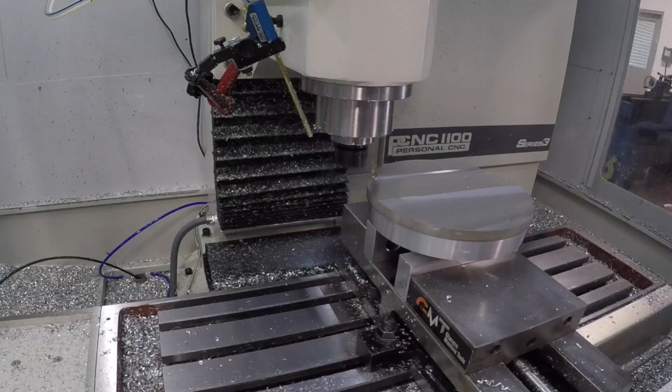So what is this? It's a cast iron cover that goes on a locomotive or a train. It's a project for Keith Rucker. If you haven't seen Keith's YouTube channel, card here. Keith's a great guy, he does some really cool stuff, mostly manual.

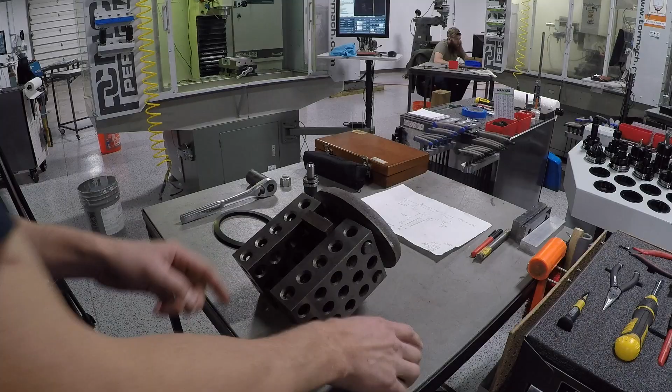And guess what, the task at hand is to machine a groove for this ring, and that screams CNC. This is going to be an easy job, knock on HDPE. So let's show you, I spent some time thinking about this fixture. Let me show you what I've got here, and I'm going to tell you why I didn't do it a few other ways. And then I want you guys to tell me if there's a better way or how you would have done it.

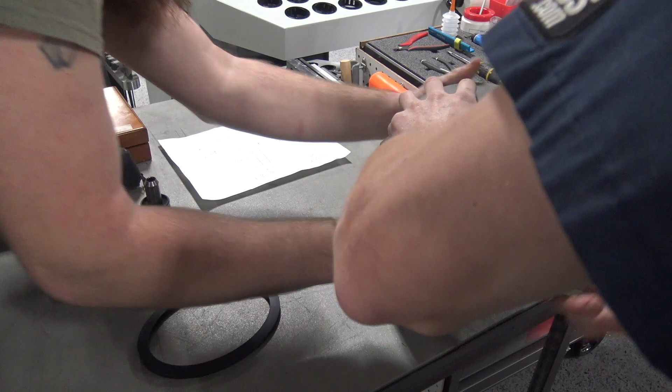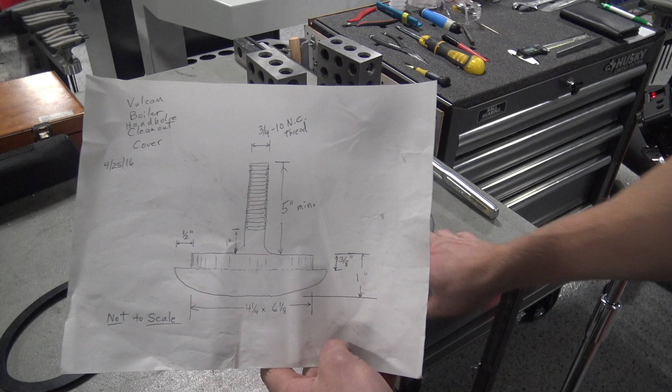So the task at hand, as you can see from Keith's drawing, is to machine a groove about 3/8, help if I turn the drawing correct way, 3/8 of an inch deep and about 1/2 inch wide. The good news on this project, the tolerances are real loose, nothing crazy from a machining standpoint.

The bad news is two things. One, tricky to fixture. Two, it's cast iron. I think I've only machined it once before, and it makes a mess. Wasn't going to turn the job down because of that, but I was excited to do a collaboration with Keith. But man, cast iron ain't fun. It should be pretty easy to machine though.

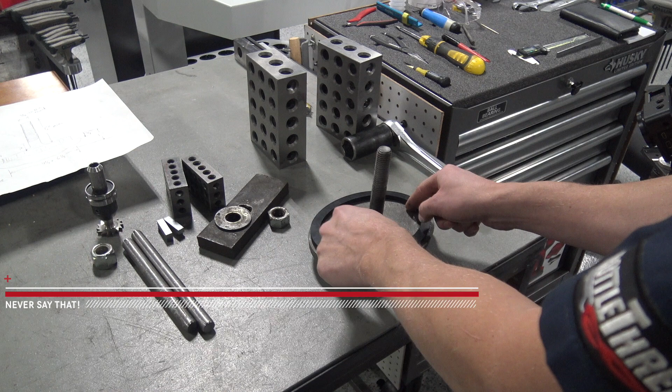So again, the idea is this ring is going to slip over this. What the problem is, this screw, period. Now, we have enough room on the Tormach where the spindle here has enough clearance to where we could actually just hold this and machine it around just like so. And obviously, that would be the easiest way to do it.

The problem is this was a cast part. There's a taper there, so there isn't a really easy way to get this exact geometry or to hold it with that taper, because even with soft jaws, as you pinch on them, it's tricky. By the way, card here to Keith's video.

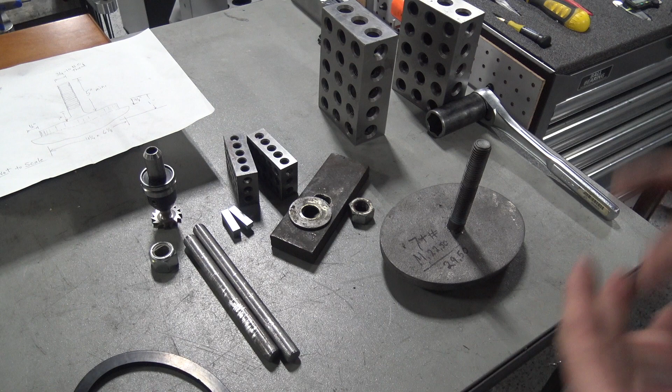This is a collaboration, so Keith is going to film some of his side, which I believe, I haven't seen the video yet, but I believe it's about how they came up with the casting, the pattern making and all that, so definitely check that out.

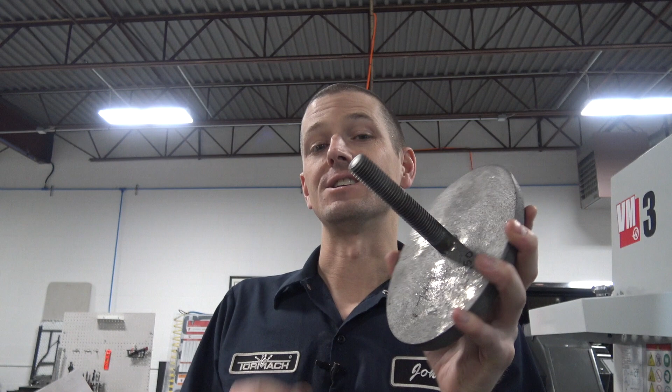I had really wanted to machine this using the 4th axis, because I thought, hey, I can stick the thread through the 4th axis on the Tormach chuck, and then hold it like this, and then I can rotate the part. Now we're using a 1/4 inch end mill, low tool pressure, short stubby tool, and interpolate around this. That's not going to work because this shaft is bent and has run out. It's basically not centered enough. It's about 20 or 30 thou off center, and the bend makes it just not practical.

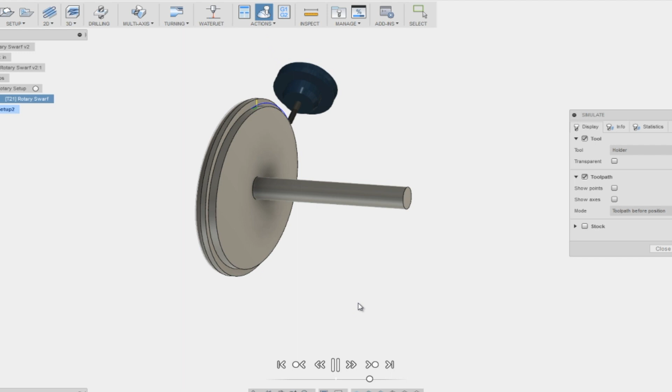However, as you can see here, we did figure out the Fusion 360 toolpath to do that. So stick around, folks, or click the subscribe button, because I'm going to figure out another project to show you guys how to machine an oval on the 4th axis.

Super useful. The other way, again, was soft jaws. I even thought about using, Tormach sells it, that melting plastic stuff, basically you could put it in the microwave, put it into some soft jaws, let it start to harden, clamp down. But again, the problem was getting it level and square and work holding and rigidity.

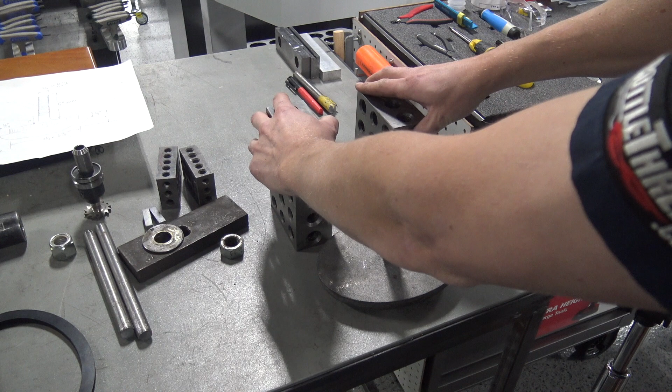So this is what I came up with. I find myself to be a very mediocre fixture maker, or rather, I'm always impressed when I see people make creative fixtures, and I try to take pictures or mental notes. But two things occurred to me. One, I've got this relatively flat surface, which is sort of what I want to be parallel to the machine surface. And two, I've got this thread here, which is pretty strong.

So I just thought, you know what, I've got to make use of that. And so I started thinking, how can I machine it upside down? The first thought was, well, how do I get to do my cutting? And I quickly realized, wait a minute here, we could just use a woodruff cutter.

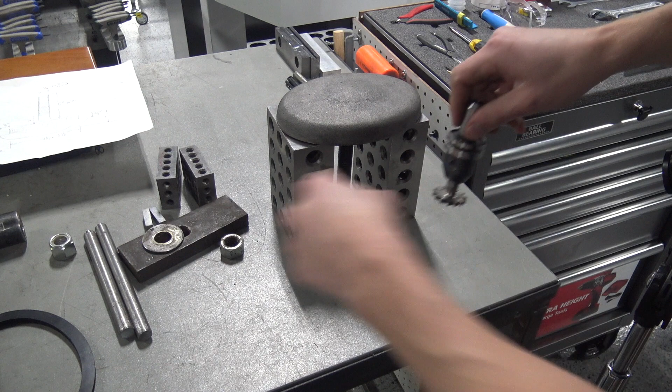There's plenty of room to reach underneath that and get it. And then I thought, well, I can't have the part touching this, so we got to lift it up. So we got some gauge blocks, no big deal. And then I thought, well, I got to hold it down. And that wasn't too tricky.

The fact that the screw's at an angle bothered me. And so I thought, well, I'll put a nut on here and a washer, and then something to pinch against, and then something to pinch this against there. And so I found some steel rod that happened to fit through here. I got the thickest, stiffest stuff that I could, so it flexes the least.

And then I found this piece actually came with in the pile of the lathe that we bought, that big 17-inch lathe, so I didn't have to make anything. Plenty strong, big chunk of steel, about 3/4 of an inch thick. And boy, when we tightened down, you saw us loosen it, there's some clamping pressure there.

So this fixture though has at least one fundamental flaw, maybe more, we'll find out. The fundamental flaw is as I tighten it down, I'm not gonna get this thing perfectly square. In other words, it's going to be at some sort of an angle.

And I thought, well, okay, I'll loosen it a little and I'll then bump it in and tram it in. But boy, it gets tricky because I can't get my big socket down here and it can't get a crescent wrench in there. And I want to keep these tight together because that's going to improve the rigidity of the fixture. And then it occurred to me, wait a minute here, we can do this in Fusion.

So let's hop over now to Fusion. Let's model this up and I'm going to show you how I don't care what angle this is at because we're going to let the computer do all that hard work.

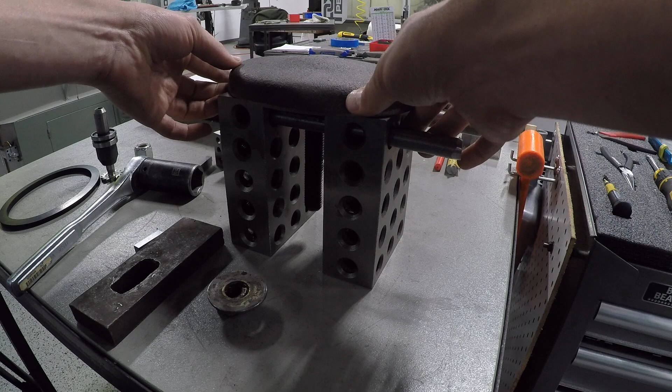So we've got a 4 1/4 by 6 1/8. That's the inside oval, and then that extends out the 1/2 inch and down by 3/8.

So Fusion 360, right click. I'm so excited for this. If it works, new component. Call it train part.

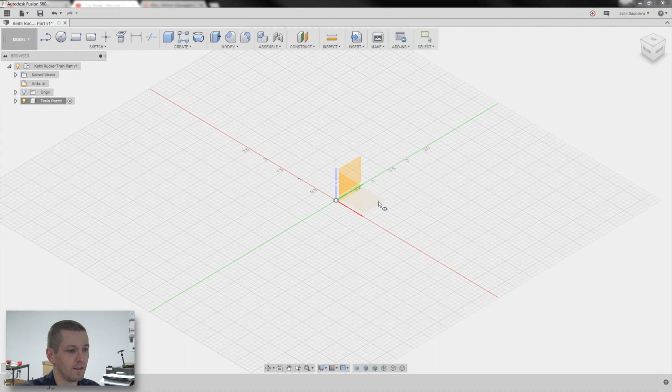Sketch, ellipse. I'm going to create it on this plane here. Turn my origin back on. At the center point of my origin, click, drag out, and then drag out again. Okay, wrong dimensions, don't care.

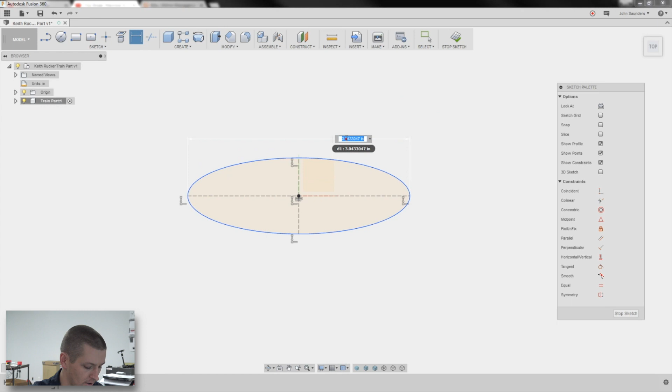I've got my 2 lines, which I can now define. Hit D for dimension. The longer one was 6.125. D for dimension, 4.25. So that's my inside ring.

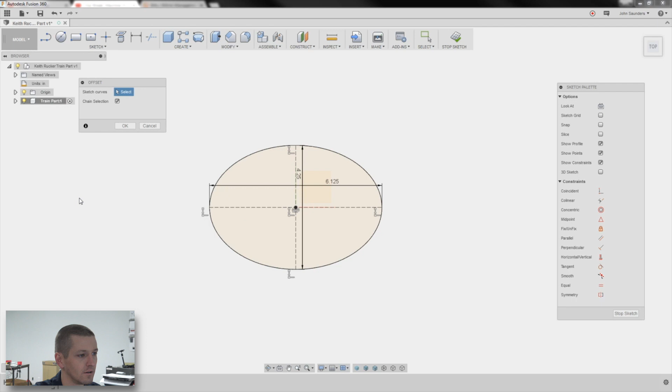So the 1/2 inch part is further out. So go to Sketch, Offset, so easy. Click on this. How far? 0.5. We're like, yeah, I love this. Okay.

I don't need to extrude it yet. What I want to do now is build out this idea I've got for how we're gonna adjust this part. When I created my ellipse, I created it perfectly left to right. And so see how we get this little constraint here? The Fusion 360 needs to do a better job of letting you label and see and edit constraints, but it's the one that looks like this.

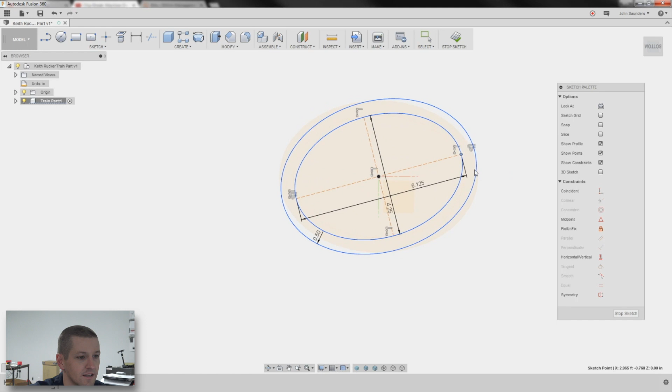It's terrible, but nevertheless, what I want to do is I'm going to click on that once and hit the delete key. And what that's going to let me do is pivot this thing left to right. Good. I'll pivot it down a little.

L for line. I'm just going to sketch a line up here somewhere. Now this one, I want to be horizontal. So see how it's got that constraint because I sketched it straight left to right. D for dimension, from the point to here, we'll just say is 4 inches. I don't think this distance really matters, it just needs to be consistent for now.

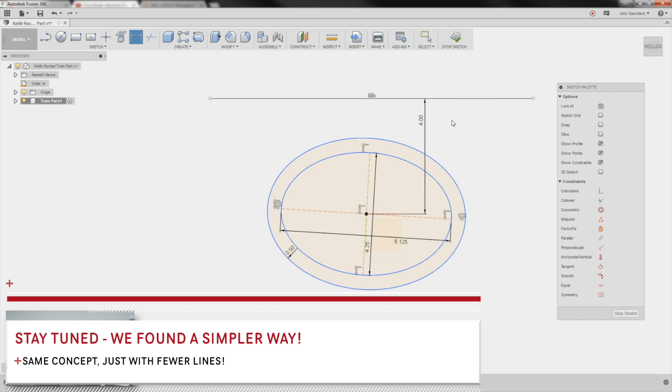Click on this line once, change it to a construction line, sketch point, point here and a point here.

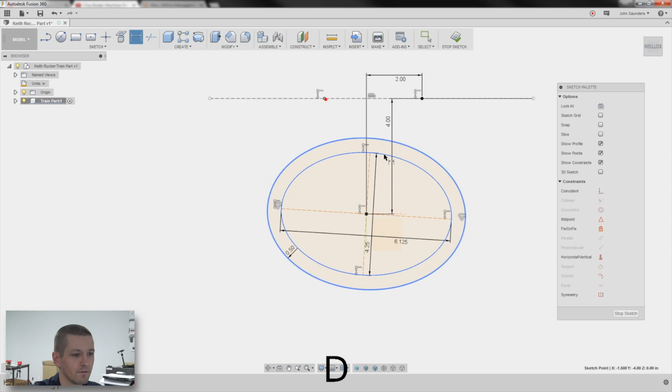Now I want to dimension those points off a center line actually, so click here to here. I want these to be 2 inches. And I want the same for here to here. So I'm going to click the 2. Notice how right now it's ready for me to type 2. I don't want to type 2. I'm going to click 2 just to link it. So they have 2 points that are equidistant off the center of the part.

Now what I'm going to do, L for line, click on my point here. I'm just going to drag down to about here. Escape, L for line, do the same thing over here.

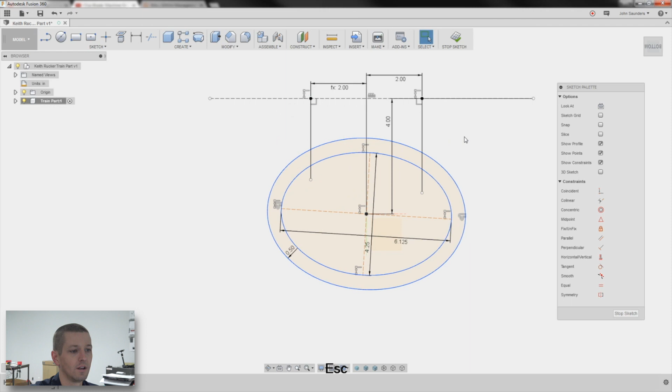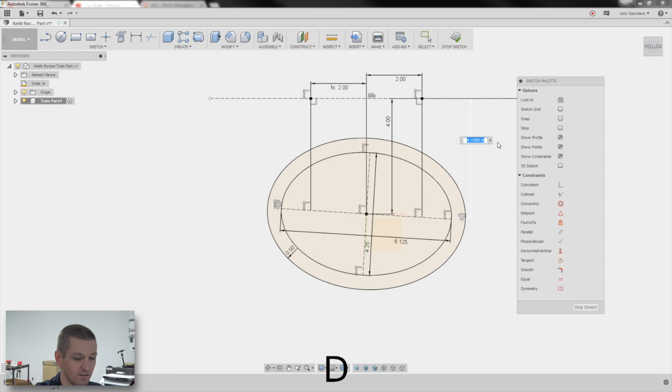I want that point to be coincident with this construction line. D for dimension, click here, type in 4.05, whatever I want.

D for dimension. This is going to be an output dimension. That's okay, it's basically saying you can't tell me what that dimension is because you've already told me enough other things that is a fully constrained thing.

I'm just showing you the output. What this is going to let me do is, let's say that this is 3.66. We're going to go over to the Tormach right now, set up our fixture, set up our part, put it in there, use the Haimer to measure 2 points, each 2 inches off center, look at those values, and come back here and adjust how the part is actually positioned in the fixture, and we're done.

The CAM is easy, the CAM is a 2D contour. I'll post the speeds and feeds when we're running the part. Let's rock and roll, folks.

246 blocks, just great, I absolutely love them. They're so much better, 1-2-3 blocks are great, but having these, they're just so helpful. I actually got to buy another set because we only have one.

So the idea is these pins happen to be a really good fit, as you can see there's not much slop. That has the added benefit of keeping these blocks parallel, which helps because they're going to get forced to parallel when I put it in the 6-inch vise.

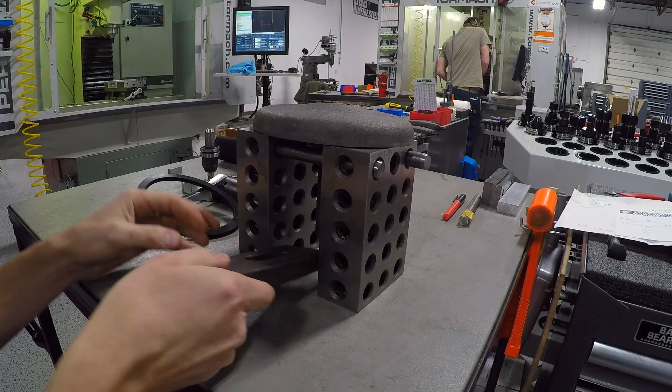So the way I was doing this last night was, forget about the gauge blocks for now because this is a little bit awkward. Get this up here, get my nut to turn it. This was awkward yesterday, let alone now that I've got 2 cameras in front of me.

Okay, now, be careful I don't drop this whole damn thing.

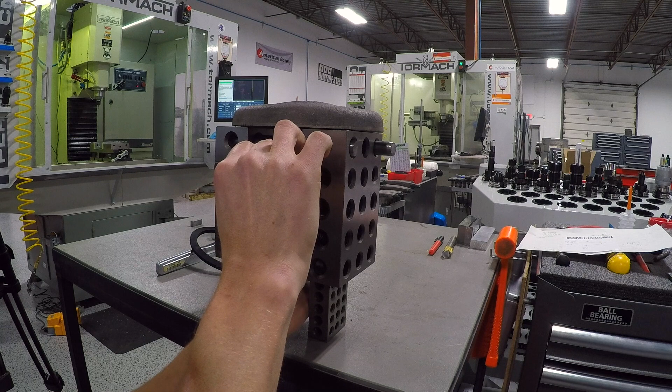So I don't want to come up all the way, just close. Now, 2 half-inch gauge blocks. Oh shoot, I screwed up, so sorry.

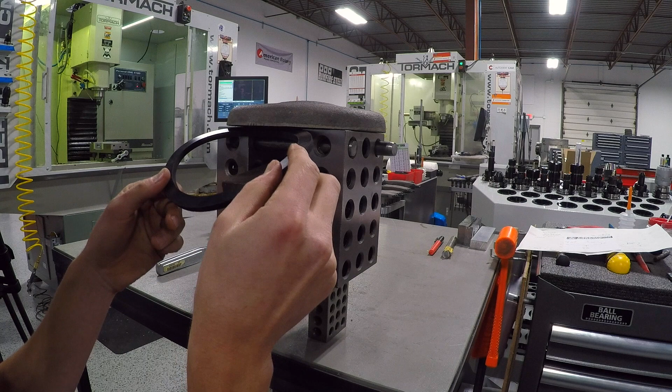We need to test the fit of this ring, speaking of bloopers, and this ring is just disposable. Keith said he's got a lot more of them, so don't worry if we screwed up. I don't want to take this thing out of the machine, so I need to take this off, put this ring back in, and leave it in there when we machine it. So hold on, let's fast forward through this.

Gauge blocks are super helpful to have in the shop, they just are. I have no problem buying the Shars sets, and again, people are going to yell at me because I'm not wearing gloves to keep your hands and oils off of these. Look, we don't do tenths work on a regular basis.

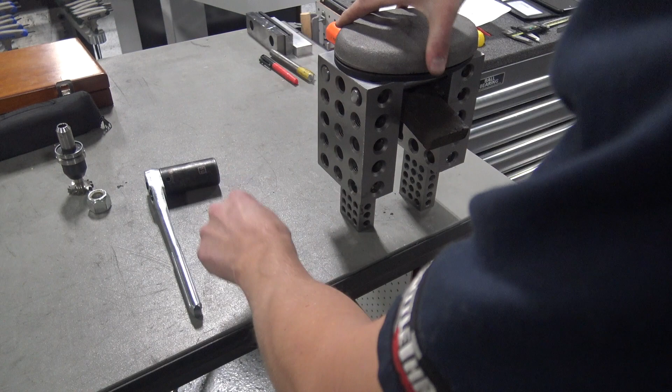It wouldn't be a bad idea for us to keep a second set of gauge blocks that we use for metrology, but the truth is I need a set that I can use, and that's this set, on a regular basis, and don't drop it like I just did. That is really stupid, sorry. But I need a set that I can use for setup work like this.

Cool, so that keeps my part flat.

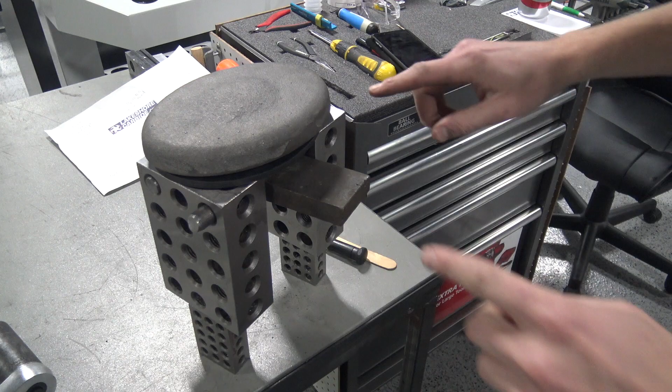Okay, I got the nut snugged, and actually this is exactly what I was talking about. It's really difficult, now that I've got the gasket in there, to keep the gauge blocks in place. Maybe there's a better way that I'm not thinking of. So I had Jared hold it while I tightened the nut, or vice versa.

But now you can see, this is not perpendicular or parallel to my X. So that's the problem we got to solve, which I think we're going to take care of pretty easy.

The old knock test, I mean, that hurts. That's solid, that's not going, well, knock on cast iron, that's not going anywhere.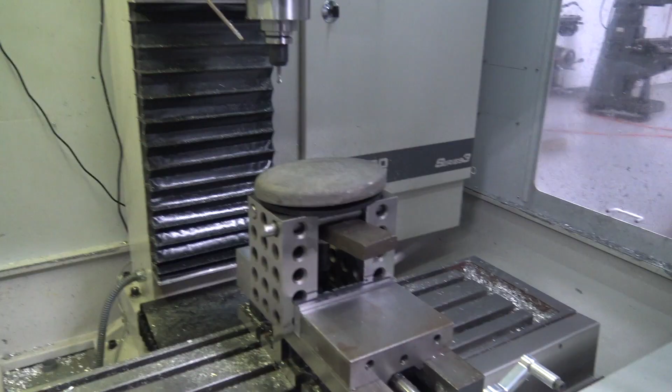I also just talked to Keith because I realized the casting is oversized around the periphery. So that presented a problem because I don't have enough cutting diameter on this woodruff to come all the way underneath unless we trim it down on the outside.

And Keith said that's actually perfect because the casting was just oversized anyway. So we're going to trim this down to the correct size and then come in with the woodruff.

Divided that by 2 in the DRO, and that gives me an X0 of dead center in the part. Perfect, okay, so now we're at X0.

What I'm going to do is come to X -2. Come down to the same Z point, just to try to be consistent. And I've got to sneak around and look before we do this.

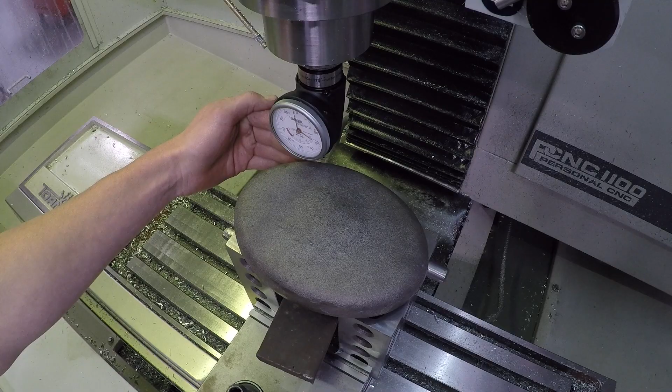Okay, first I want to establish this—it doesn't matter what it is. I'm just going to go to an arbitrary distance here and set Y0. So I've established this fake line right here. It's not the same as the 3 or 4 inches we had in Fusion, but I just need a known distance to go between this point here and that same point over here and back. So I'm going to see where my Haimer equals 0.

Right there. So my Y dimension in PathPilot is negative 7.642. Go over to the right side, so go to positive 0.2... .7647. There's no way. Oh come on, that's impossible, folks. We're 5/10, oh my God, come on. The whole point was this thing was supposed to be crooked.

I mean, still, what? Let's check on the front side just to see. Okay, that's more like it. This shows that I'm 23 thousandths out. Now here's the thing—these are loose tolerances, and what I care about is the fit of the O-ring over the place that we're going to machine. So I can't emphasize this enough, it doesn't matter. There's no such thing as tenths of an inch on a cast iron plate. But believe it or not, we're actually far more square than I intended to be.

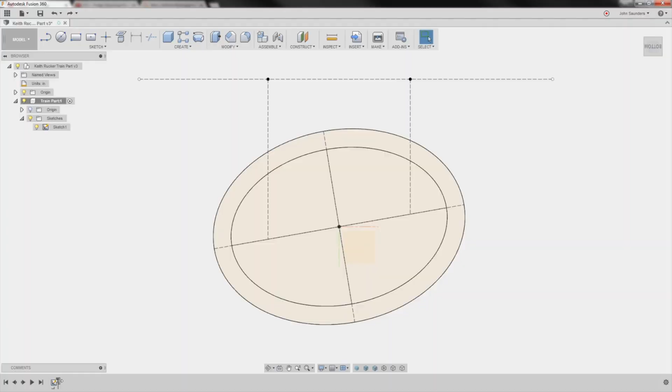Okay, so what I was supposed to do now was to impress you guys by saying let's say there was a 0.2 difference in Y dimension. So this center dimension is 4, so if I type 4.1, this line becomes 4.1, that becomes 3.9, and that compensates basically—there's other ways you could do this with different points, but the point from there to there is 0.2 different. Fortunately we don't need to do that because the darn thing is almost perfectly square, so sorry, but this is such a cool thing to update.

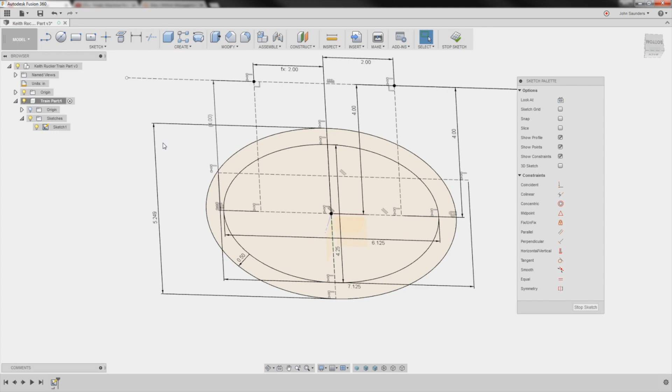So to extrude it out, to make our actual shape, E for extrude, I'll go down negative—it doesn't really matter how far down. So I'll just go down 0.375, negative 375, and turn my sketch back on right here. E for extrude, and I'll extrude both these up, say 0.5, negative because I want it to go up in this case.

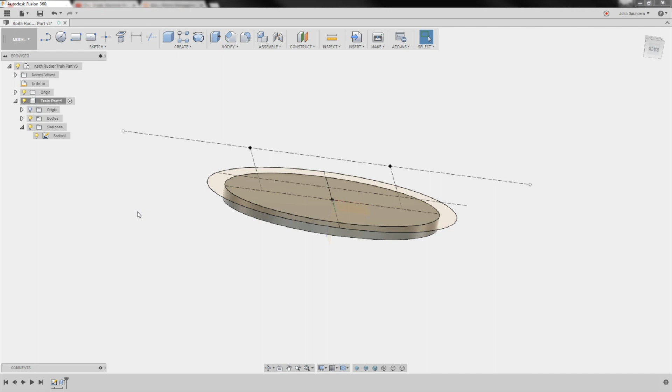You know what, I think I screwed up this one—this one was supposed to go down. Sorry. There we go, that makes sense. And then this guy will go up. E for extrude, this goes negative 0.5. So that's what my lip will look like that we'll cut with the woodruff.

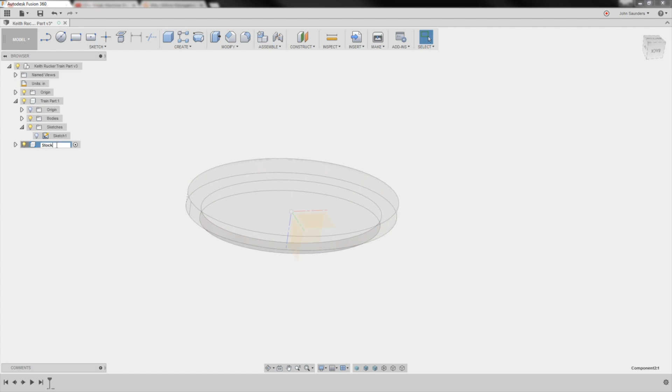I'm going to go ahead and model my stock, you'll see why in a second. So new component—stock. I'll turn off the visibility here. Sketch, ellipse, right here.

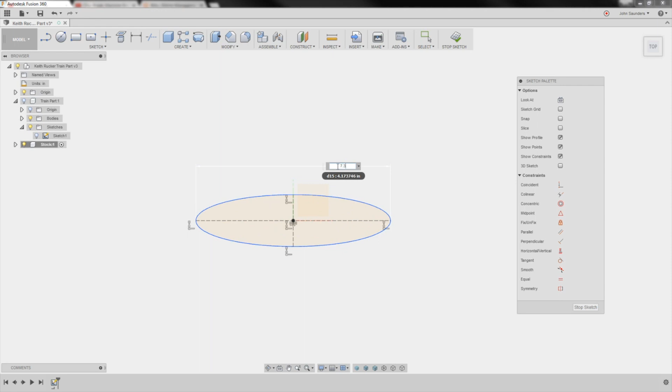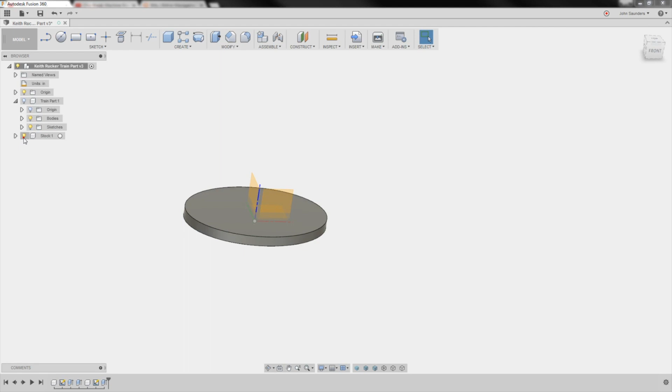And my stock was measuring about 7.35 by 5.4. E for extrude, 0.5—just not too concerned with the height here. So now you can see, even though the height planes... let's switch over to my wireframe. So there's my stock, and my part is nested inside of it, like so. You can see how the stock is a little bit bigger as I toggle the part, which is inside of it, on and off.

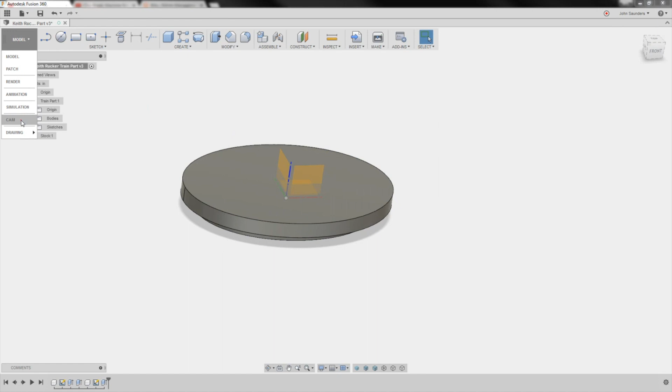So I don't need the stock visible right now—we're going to use it in the CAM though. Model CAM, new setup, milling, find stock, change the mode to from solid. What's my solid? Expand your CAD tree right here. Expand the stock—I don't even have to turn the light bulb on. Expand the bodies and pick that body as the stock, and then set up. I am actually going to use the bottom face right here.

So let's see here, it's going to be a model box point bottom center because we're going to reference off of this reliable-ish flat face. The top is definitely curves, I don't want to use that. Click OK. I'm going to do a 2D adaptive clearing. We're going to do a new tool here.

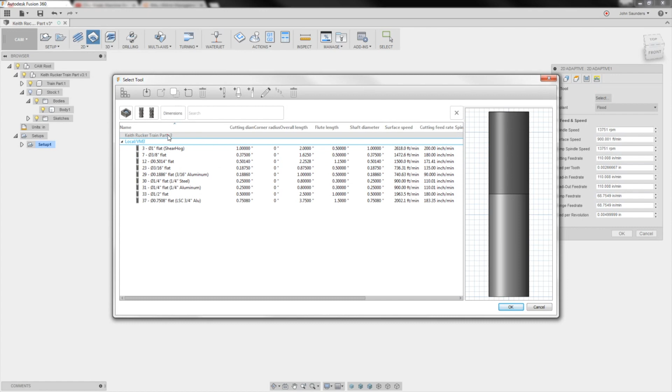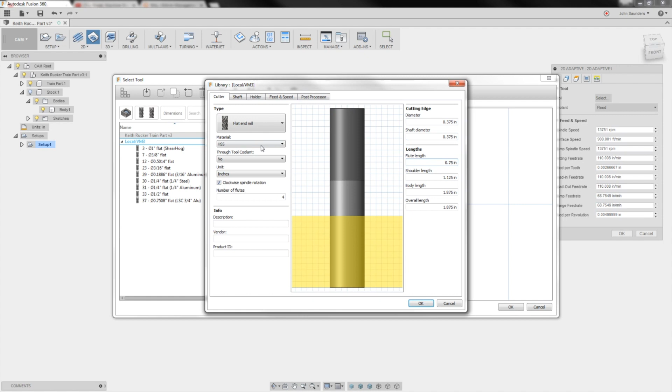Let's see here, it's going to make me a 3/8 inch Lakeshore 4 flute—flat end mill, 4 flutes, 0.375, carbide, doesn't really matter. But feeds and speeds, I'm going to take it easy, so I'm going to just go 1500 RPMs and 0.001. I know that's slow, but guess what folks, it's not the time here, doesn't matter. Click OK, that's supposed to be OK.

And 2D adaptive here, let's just see what we get. I didn't adjust my parameters yet, that's okay, get a good toolpath.

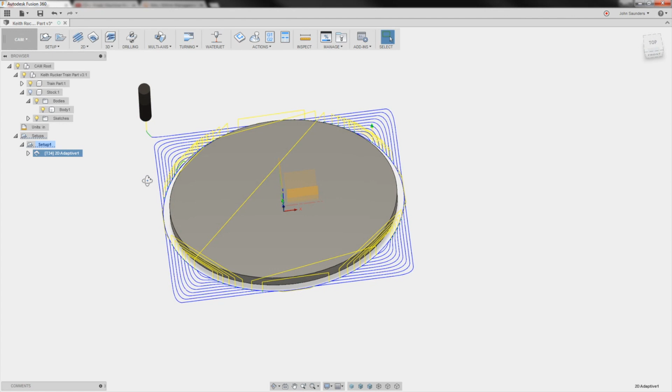So this is kind of a glitch, I think. Actually they know about it, it's getting fixed, but it should have picked up my stock. Since it didn't, I'll collect stock contours. I don't have to pick anything here, just have to check that.

Let's do passes. Optimal load 0.375 times 0.15. Radial stock to leave, just say 5 thou. We'll come back and do a cleanup pass. No axial.

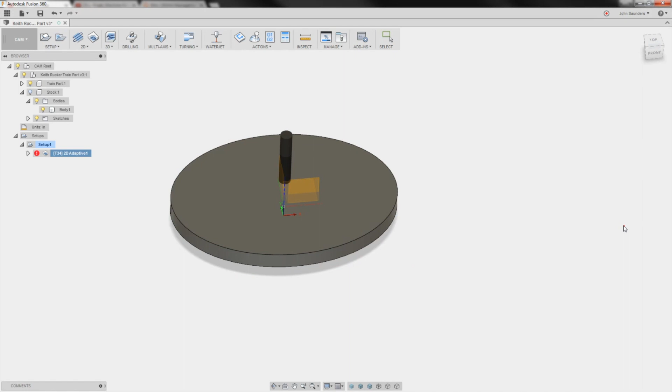Huh, why isn't it picking that up? Maybe I have to turn my stock on. That's annoying, I think that's a glitch.

There we go, that's what I wanted. I wanted it to basically have a constant engagement, which it does change a little over here. I just don't machine cast iron a lot. That's the beauty of adaptive - it means I don't have to take as many chances because it's going to keep that chip load constant.

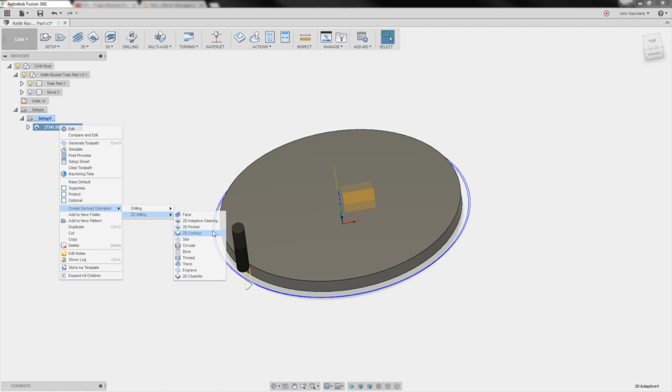I want to do a cleanup pass, so let me turn my stock off here again. Right click, create from derived, 2D milling, 2D contour. We're done. Click OK. Does a 2D cleanup pass around that, which is awesome.

Now the hard part, not really, the woodruff. Oops, that's my error - lead in vertical might collide with stock. So let's see what happens in the simulation.

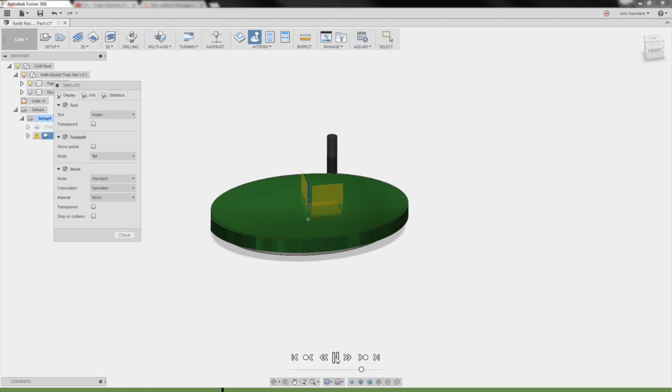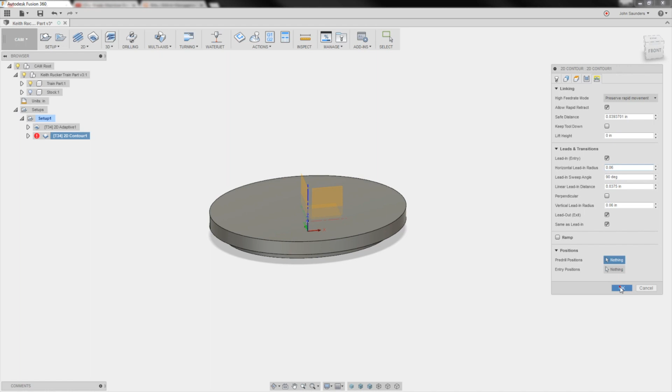The vertical arc. So lead in, maybe just increase this. If it makes you feel any better, sometimes I get confused too on these errors. Huh, I happen to fix it.

I'm going to lead in, so this is a great example. I don't want to lead into the back corner where it's sort of blind to me. So we're going to right click, edit, last tab. I'm going to pick the entry position and just pick a random point here on the front. Oh come on, there we go.

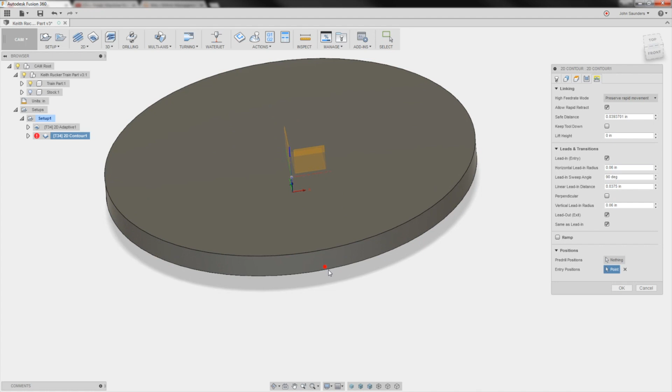Well it doesn't have to be a point on the line. You'll see it's going to move that toolpath around. It's still not going to violate your model. That way I can see what's happening with that tool on the cleanup. That one I'm fine with.

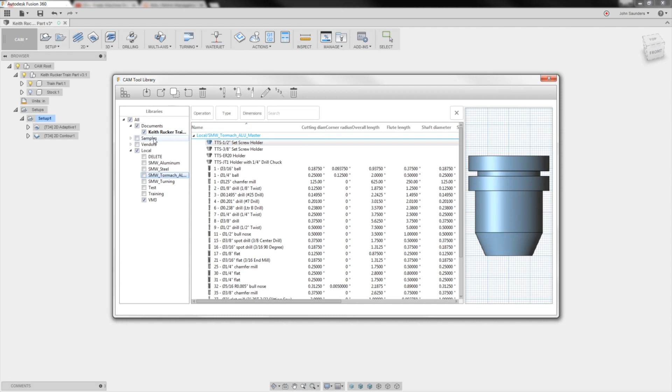Let's see here, new tool, cutter, slot mill. My woodruff - now here's the thing, I'm not exactly sure if it's perfect dimensions, so I know it's 14 teeth. I think it's measuring 1.395, no corner radius, shaft diameter I'll have to check that, but I think it's 3/8. Flute length is the height of the woodruff, 0.193.

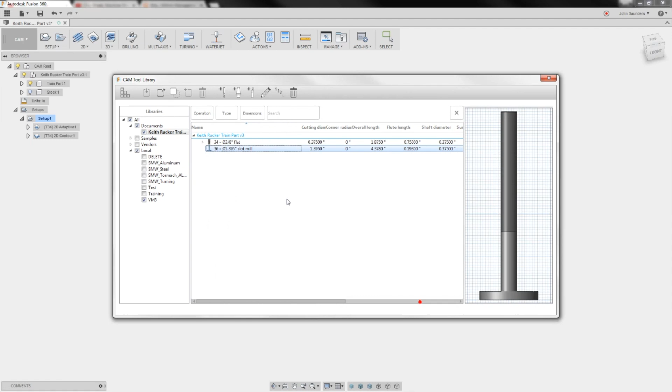It looks good. Feeds and speeds, I'm going to run at 1,000 RPMs and 1 thou per tooth. So that's pretty fast because it's got so many teeth. Post processor will say it's tool 36. And we're good, click close this.

2D contour, so this is interesting. Pick my tool, I love this. Silly filters, go away. Slot mill. Geometry, I'm going to pick this line here.

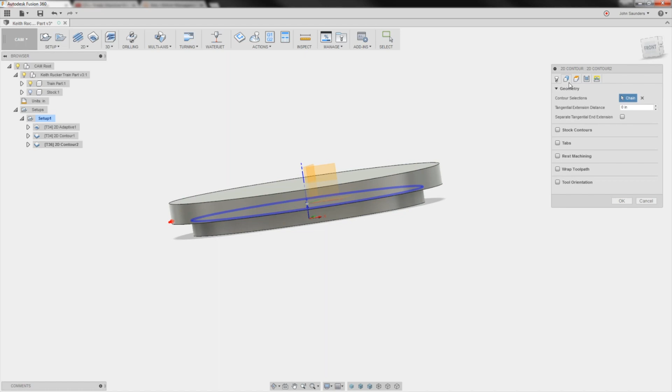What's my bottom height? My bottom height is going to be selection of this. What's my top height? I don't know if it matters here, but we'll say selection, selected contours would work because I picked that contour right there. So we just click OK.

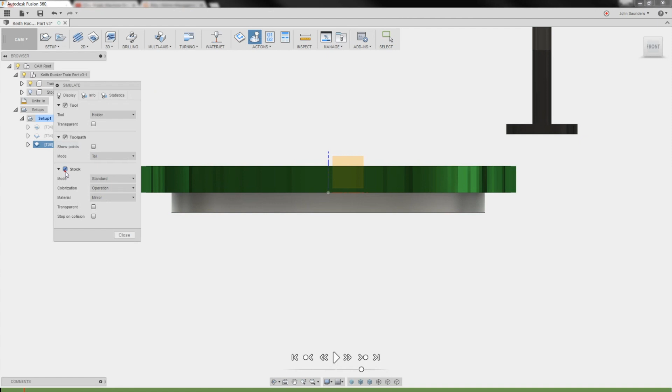I think what you'll see is it's only going to machine at one height, which is okay. We can fix that in a second. Let's do a simulation, with stock. Click play. And you can see it's kind of come around like so. And ooh, we're cutting it close.

Let me go check the shank dimension real quick. My bad, I must have had a brain fart last night because that is not going to work. It's too tight, but I've luckily got another woodruff.

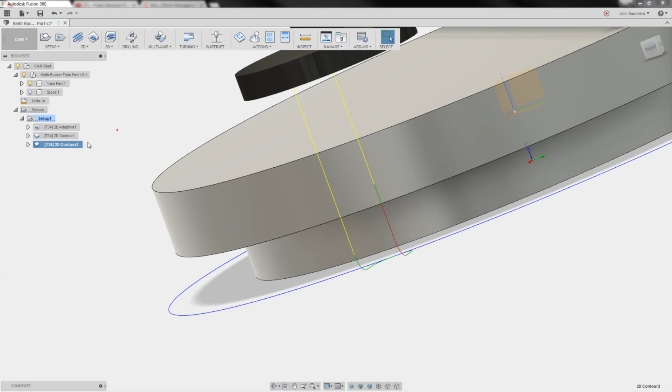So let's edit that tool. We're going to now use one that is 1.52 in diameter with a 1/2 inch shaft. It's only going to give us 10 thou clearance, so we'll have to watch when we run it.

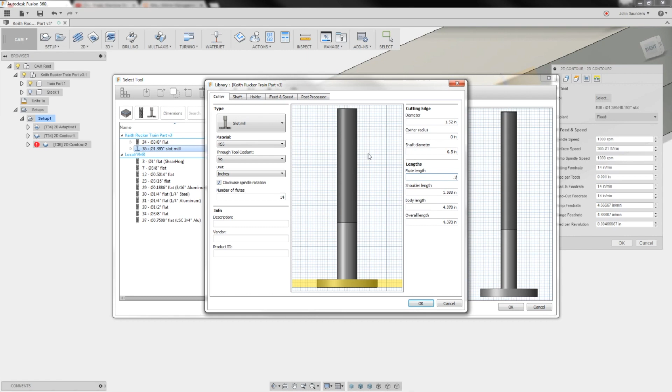Worst case, I'll call Keith, but I think I could trim a couple thou off the OD of the part because it's not a critical dimension, or I could buy a new tool. We'll see. And this one's 0.25 inch flutes. It's also still 14 teeth. Good, yes.

Yes, okay. So now, see the lead in, lead out is no good here. So all I need to do is manually increase that so we don't gouge into Keith Rucker's casting. So linking.

Let's see here, horizontal lead in, I guess we'll just say 0.5, something crazy, make sure that works. Yeah, there we go, way better. Plenty of clearance now.

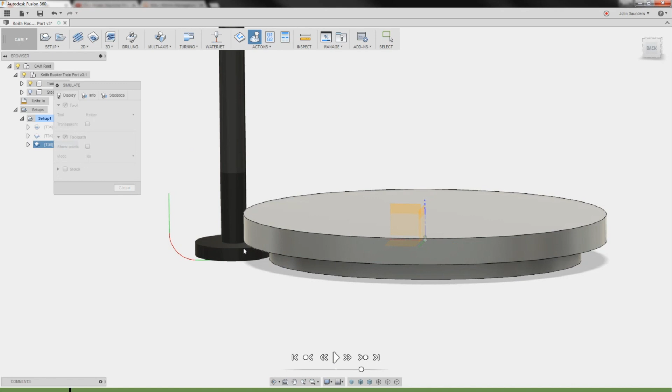Simulate, play. Cool, so the good news is we have just barely enough clearance there, but should be okay.

Now obviously I'm not going to do this one pass, I just want to take a look. First, let's get our heights set. So that'll be the first pass.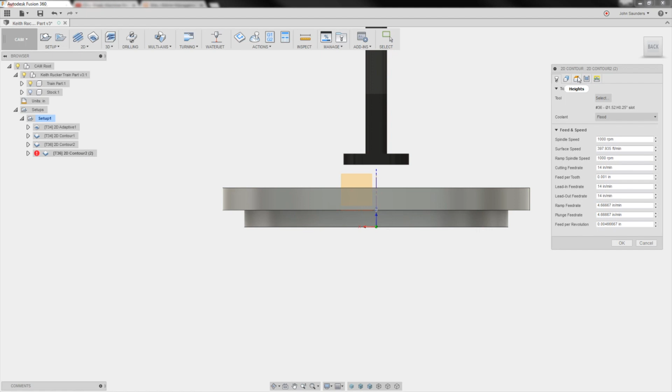First height pass at least, where it goes all the way around. Then we'll duplicate this, and think about it, the tool is a 1/4 inch tall. So what I'm going to do is say the bottom height is a selection of this.

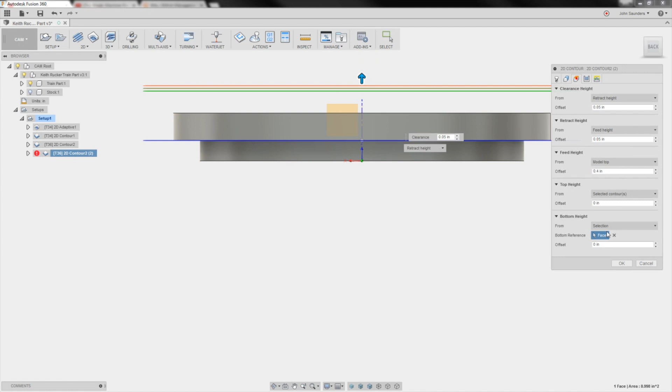And if we click OK, it's going to put my toolpath right there, but I want it lowered by the height of the tool. So all we've got to do is edit heights, offset this by -0.25. That's going to give me my second pass, which will be at the correct height plane.

To give us a 375 tall part. Simulate, play, boom. See that? Perfect. Now let's add a bunch of radial passes, because obviously I want to go easy on this.

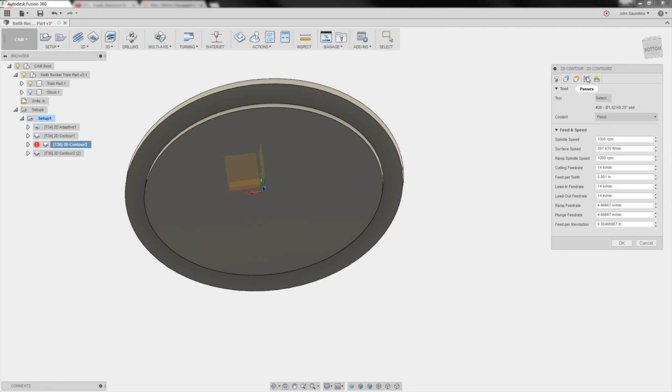Passes, let's see, roughing passes. Maximum step over, say 0.2. And let's do three of them, at 0.17. That should break it up, if I'm thinking correctly.

1, 2, 3, 4. I wanted to only -- oh, because it treats the finished passes. See, that's one reason why I normally just do multiple finishing passes. I want 3 of them at 0.17, and this will give me 3.

Yeah, there we go. Let's go make some. Actually, you know what, let's make sure this is entering there. I can see it. Good.

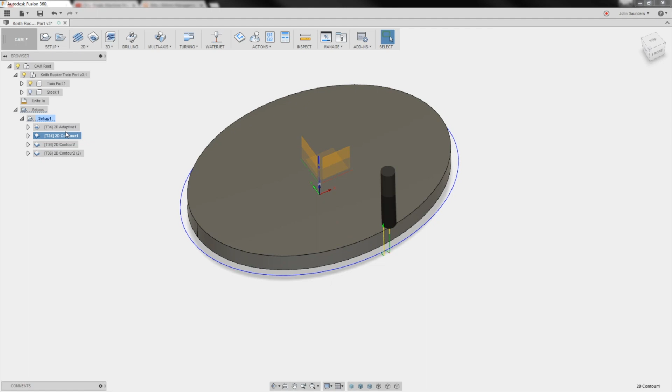Let's go make some chips, folks. All right, here goes nothing.

Awesome, you can see we're making a real chip, which I like. We're going to have to clean the machine afterward, no question. Cast iron just basically turns into an abrasive chip or dust.

So, you know, I don't mind doing it. I don't like doing it. And all we do is clean the machine when we're done. I put some tarps down, you might be able to see them in the GoPro background back there, or trash bags, which will just help contain the mess a little.

But, you know, this is great. First of all, we're getting a great surface finish there. And we would fear getting chatter in this work holding, which we're not.

So sit back, relax, and enjoy some cast iron. Railroad -- what's this thing called again? Vulcan Boiler Handhole Cleanout cover plate.

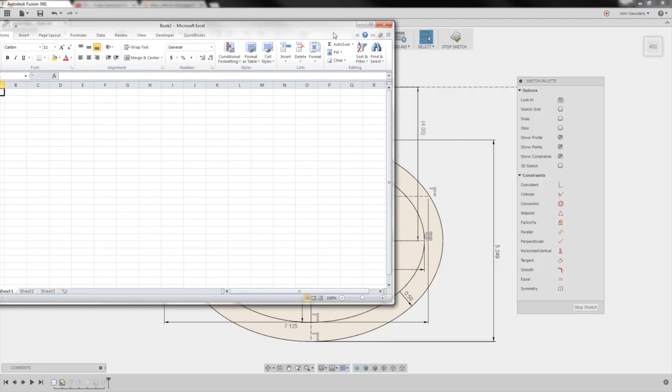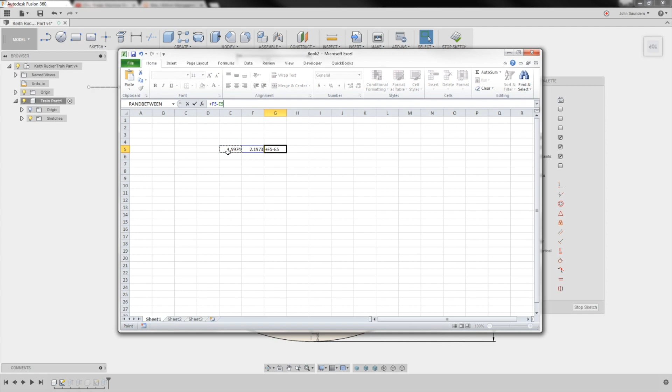The left side was 1.9974 and the right side was 2.1973. So these numbers don't matter, it's the difference. This minus that means it's 0.2 inches longer on the right. So I'm going to say -- oops, I'm going to say 3.9.

Oops, wrong one. This one. 3.9, 4.1. That means there's a difference in these two bars, this one and this one. There's a 0.2 inch difference, 3.9 to 4.1. That's got it canted. Should be all correct.

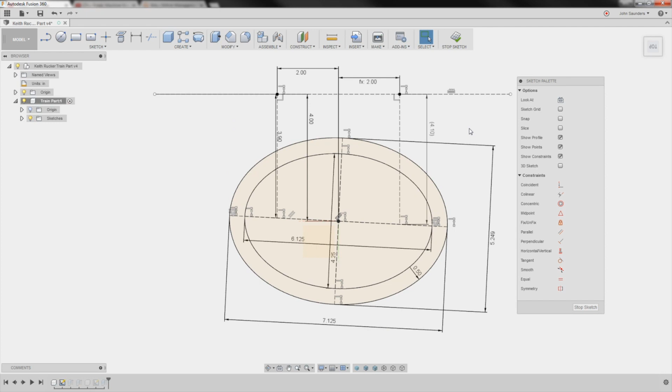So we're going to try a little bit easier. Lower surface feet per minute, 300 RPMs, 2 thou per tooth, which is a pretty slow feed rate. So this is going to take a while. Again, let's just make sure we get it done.

Figured out a simpler way to do the same thing, rather than using a construction line across the top, which can get more confusing than necessary, because guess what? Simplicity is genius, and I'm not sure this is genius, but it's better.

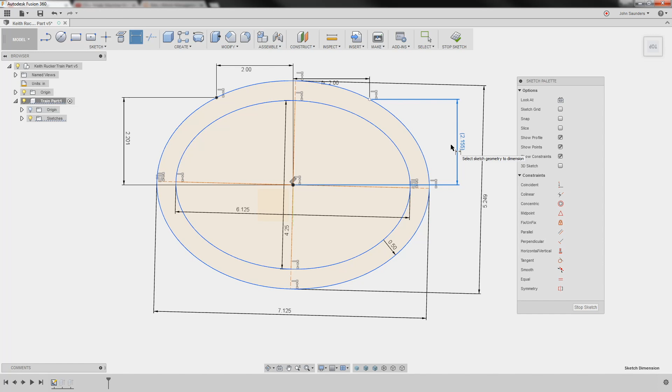No big deal, awesome. The other thing I'm going to do, we're going to try conventional machining, and we're also going to reduce the tool pressure by taking slightly less than a full height depth of cut, which is not shown here. I guess I lost that.

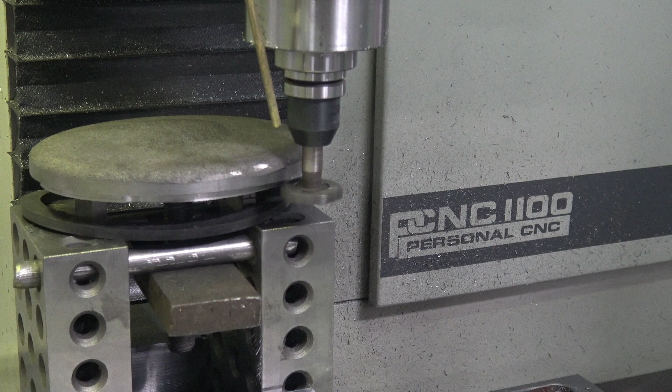I'll have to fix that here. See how I dropped it down? So I want to lower the tool pressure. That's really key here because I want something that works, and then I can build up from there. That was kind of the mistake I just made, was I didn't start low enough and slow enough, and I wasn't even thinking about not taking the full height of the cutter.

This doesn't sound great. I don't love this by any means, but it's a lot better. You can just tell. I don't know if it's going to come through on video, but when you see the part in person, you can tell that's a better recipe. Now, I honestly think that cutter might be dull, and that stinks, and that's my fault, and I don't have another one, and that's not normally how I operate.

We've started to get a little bit more trolls on our channel, and I don't want to say I'm sensitive to them, but I want to encourage you guys out there, whether you're working with cast iron or regular aluminum or titanium or 6AL4V and stainless, it's okay. We all struggle, we all fail, even on what are supposed to be easy materials.

Be smart though. I'm liking this recipe a little bit better, and you know what? It's going to take a little bit longer. I don't really care, I'd rather get a recipe that works. It's not going to spin the part in the fixture or damage it, and I can listen to the machine while I'm doing some other stuff nearby.

So I think we got it now. It's going to take a little while here, probably about an hour to run through this, which I know is ridiculous. And oh man, if we could have had this thing in the 4th axis with a 1/4 inch end mill, I think I would have banged out the toolpath in like 6 minutes. I get it folks, but still fun, and it'll be awesome to get this thing done.

You can see we lifted it up a little bit higher, taller gauge blocks. That just made it easier to deal with the fixturing and getting it all positioned correctly and tightened down.

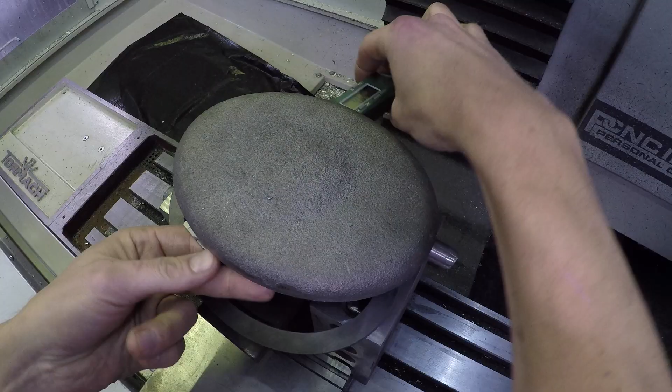All right folks, let's see what we got. So he wants me to try the ring, but it'll be a squeeze around, and I want to check my tolerances first, which is kind of tricky. I think I can, well, I did it a second ago before the final cleanup pass of 20 thou, and it confirmed we were on, so I don't have any real worry.

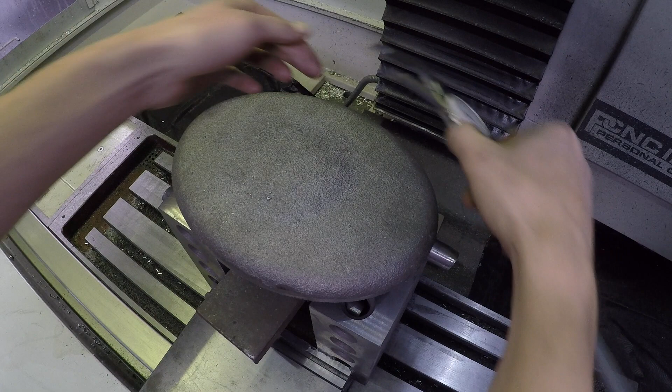So it'll be 4 1/4. Can you see that on the? Well, I don't think I can take these out locked in position, but folks, how's that for tolerances? Check our OD, 6 1/8 was the target. Again, we got loose tolerances here, but let's see what we did.

Oh yeah, oh that's awesome. That is awesome, oh my god. All right, what a win. Take a look. Now, I'm not even a car guy, let alone a train guy, so I don't know anything about these, but I am proud of that. I am proud of that. That's awesome.